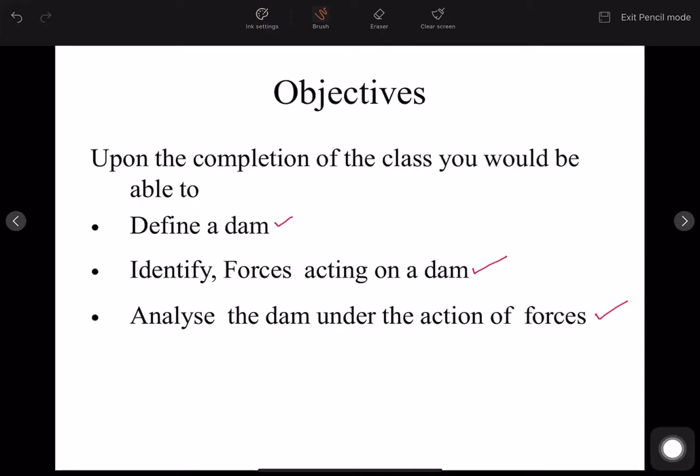So if you go into the subject, initially what is meant by a dam? Dam is a structure constructed in masonry or concrete across a river or a stream. So, a dam is a structure constructed in masonry or concrete across a river or a stream.

So, there are separate theory and separate concepts which involve what is the site selection for a dam structure. So, that means at which location we need to take up the construction of a dam. So such points will be involved in that. So, to store a large amount of water for drinking, irrigation, power generation, etc.

So what is the usage of dam mainly? Generally, it will be constructed for diversion of water actually. So diversion of water, nothing but either you can use such water for drinking purpose or most importantly for irrigation purpose. I mean to say by constructing some canals on the upstream side of a dam structure, and also for hydroelectric power plants, that is for power generation purpose.

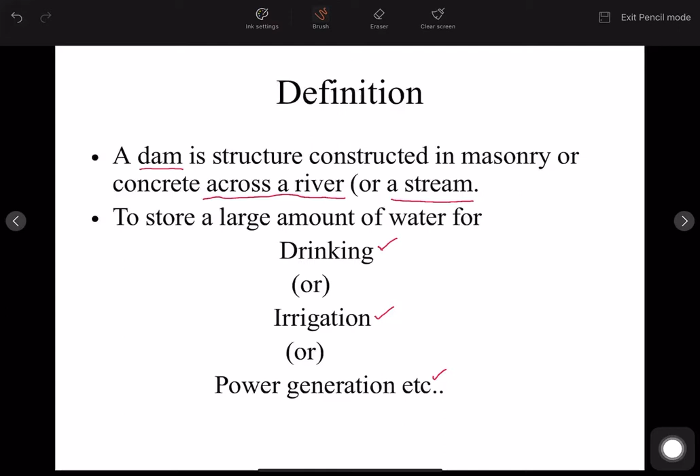So if you go into the next topic, which is forces acting on a dam. The following forces generally act on a dam, that is self-weight of dam represented by capital W. Self-weight of dam, nothing but it can be a masonry or concrete dam. And second one is pressure of retained water, represented by P. So pressure of retained water.

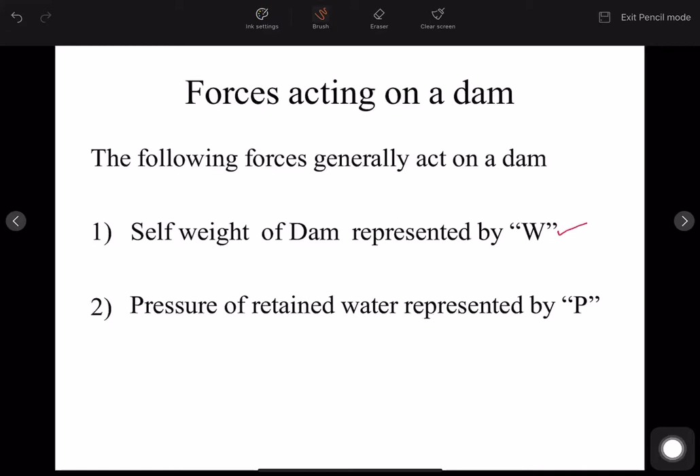So here we can see the cross section of a dam. We call this side as upstream side of the dam and this side as downstream side of the dam. So this is a typical trapezoidal cross section of a dam. As we can see, top side we have certain top width and the bottom side we have certain different bottom width.

So these are the assumed dimensions of a dam. Top side we have considered as small a and bottom is small b, and on upstream side we have a height of water up to small h, and we are considering capital H as height of dam.

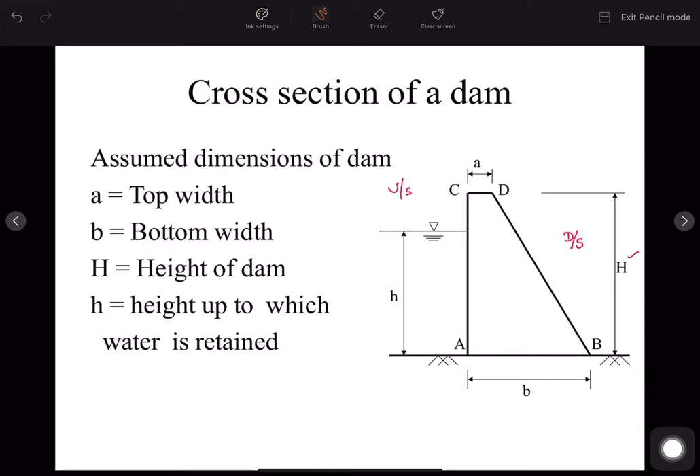So as I have mentioned earlier, the basic forces which are acting on a dam are self weight, nothing but weight of the dam, capital W, and water pressure from the upstream side. So water pressure from retained water, that will be P, right? That will be in the horizontal direction, and as we already know, weight will be acting perpendicularly to the ground surface, that is capital W.

So generally P and W will be acting on the dam. Because of these two forces, as they are orthogonal, there will be a resultant force coming out of these two forces. We'll call it capital R. So now totally there are three basic forces which are acting on a dam, that is horizontal force P due to water pressure, self weight of the dam, capital W, and resultant force, capital R. So like this we can mention the basic forces which are acting on a dam.

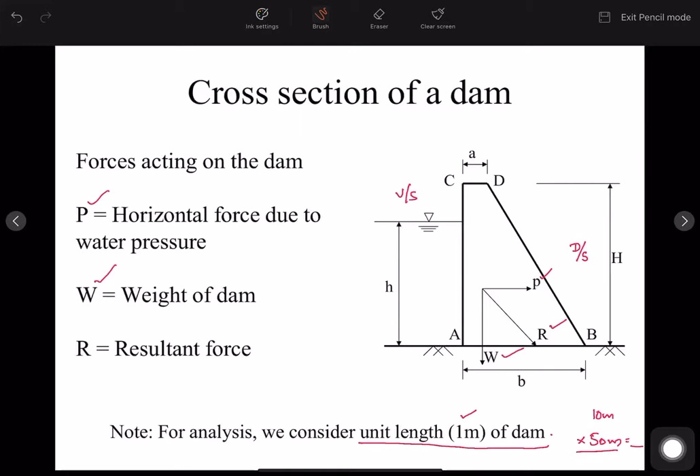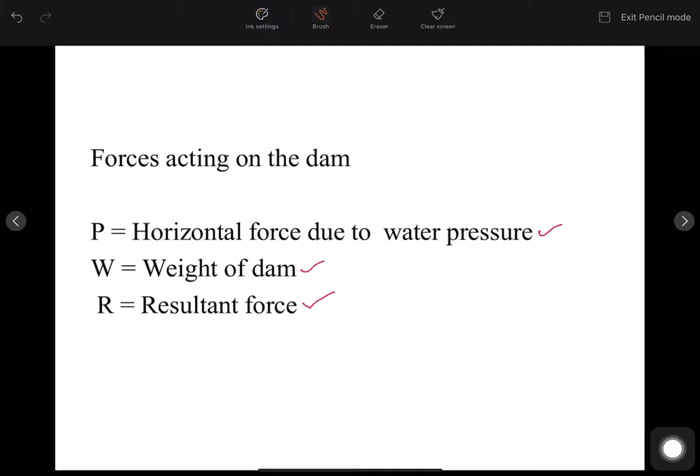So forces acting on a dam are horizontal water pressure P, weight of the dam, and resultant force. So analysis of a dam. This is the important part of this tutorial. So what is meant by analysis of a dam? It involves calculation of magnitude of W, I mean to say calculation of self weight of the dam, and the distance of its line of action from vertical face of the dam.

So we will see here calculation of capital W and the distance of line of action of self weight to the vertical face of the dam, that means here X. So X and W, these two we need to calculate initially. And the next is magnitude of P and the distance of its line of action from bottom face of the dam.

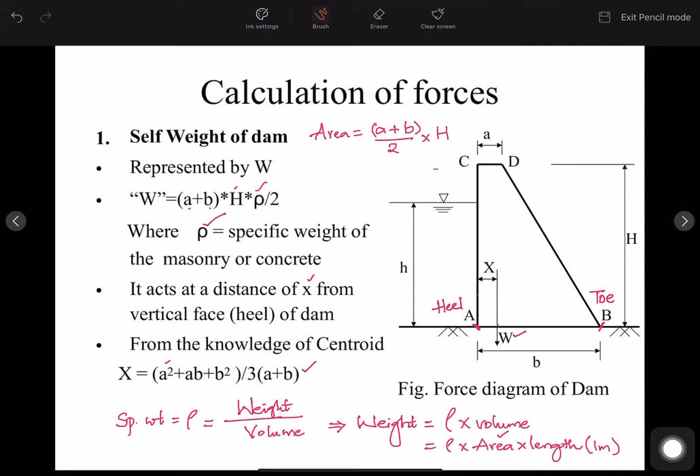So how we need to calculate the centroid of a trapezoid, centroid of a rectangle, triangle, and various other shapes. So by using such knowledge, we can write the centroid equation as (a² + ab + b²) / 3(a + b), right? So we have a and b values here, and if you substitute those values, you can get the x value. So in this, the first part is completed.

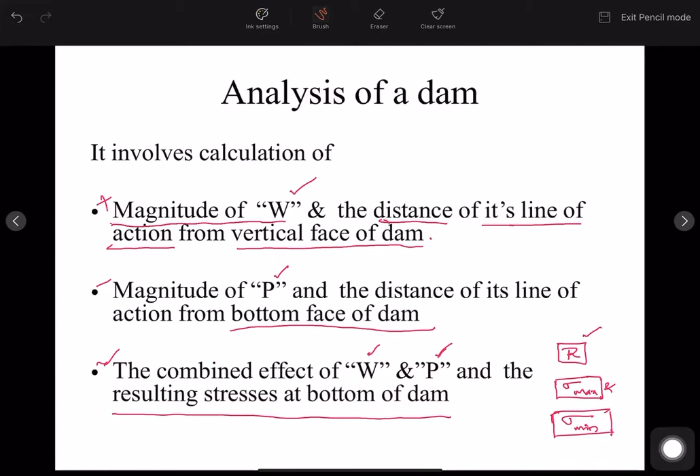The second part is magnitude of P, that is calculation of forces in the dam because of horizontal force. We need to calculate now the horizontal force. So horizontal force P is due to retained water on the upstream side, right? So that I have mentioned here, it is due to water pressure.

So from hydraulics, we know that water pressure varies from 0 to wH. I mean to say from 0 to, this is wH, right? 0 at the water surface and wH will be at the bottom of the dam. So the variation will be linear, and this thing you will be learning in your hydraulics. So as the liquid is water, we can use specific weight of water as 10 kilonewton per meter cube.

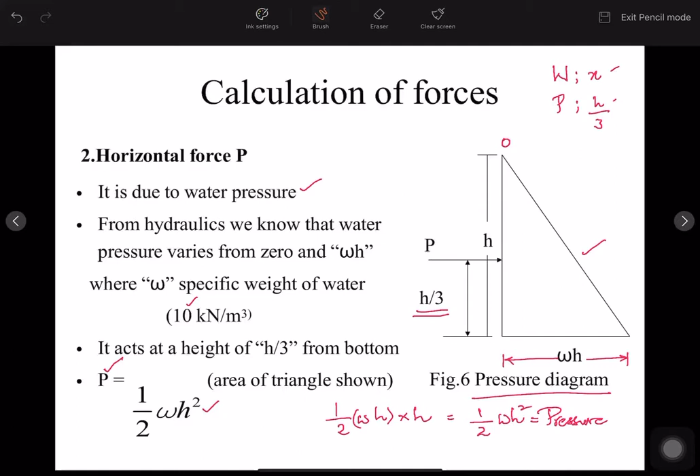Right? Now we got W and its distance x, P and its distance h/3, right? These two things we have calculated now. So after this, we need to calculate the combined effect of W and P, that is nothing but the combined effect of self weight and horizontal water pressure. As I have already mentioned, because of these two forces, there will be a third force which is known as resultant force, right? So that resultant will be capital R.

And capital R is equal to the square root of W² plus P², because these are acting at 90 degrees, and the resultant will be at an angle. So if we apply Pythagoras theorem, we get R equals the square root of W² plus P² in magnitude. This condition is applicable only for the vertical face of the dam structure.

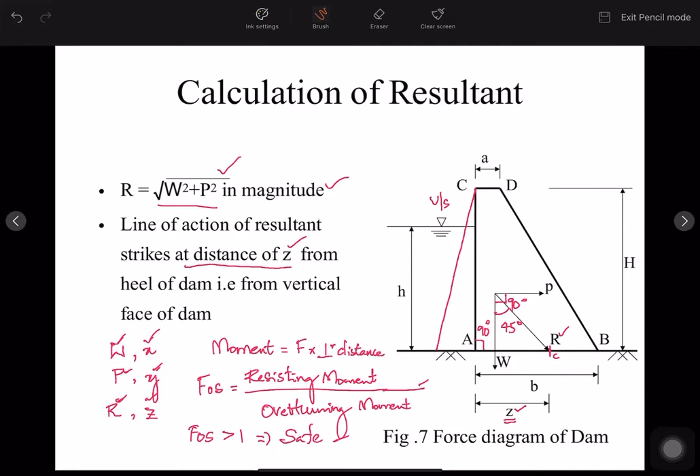So the thought of explaining all this to you now itself means why we need to calculate the force and its acting distances and all that I want to make it clear to you. So we are calculating the forces and its line of action of forces distances. So what is the significance of this Z and what is the significance of this R value and all that we'll see in the next class. So for now we'll conclude this class here, and before concluding we will just revise what all we have just discussed in this tutorial.

So in this class you have learnt about the definition of a dam. So if you remind yourself, a dam is a structure made up of masonry or concrete, which is constructed across a river or a stream. And what are the main purposes of this dam? So it is constructed for various purposes. So most commonly those are for drinking purpose or for irrigation purpose, and also in some cases for power generation purposes. It doesn't mean a dam is only intended for one particular purpose. It can be multi-purpose, I mean to say. So most of the dams, 80% of the dams will be for drinking and irrigation purposes only.

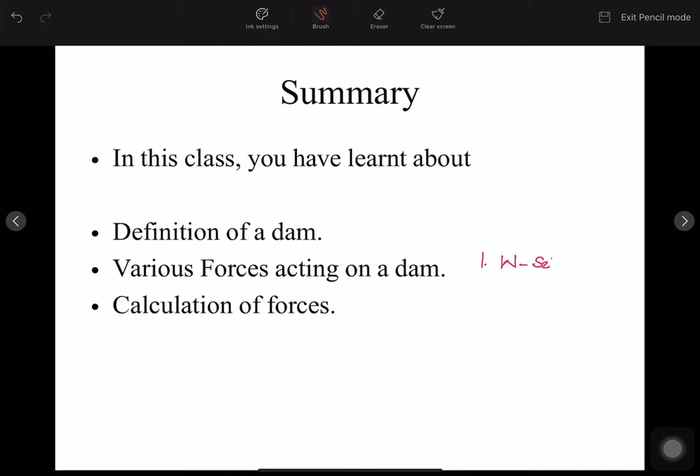And if the volume of the dam is huge, there we can go for hydroelectricity also, I mean to say, for power generations as well. So that is the basic definition of a dam and the basic uses. And next is various forces acting on a dam. So what are the various forces which we have seen till now? First one is W, which is self-weight of a dam. The second one is horizontal force due to water pressure. This is water force.

Right? And the third one, because of these two, we'll get a resultant force, right? So these three are the most common forces which will be acting on the dam. There are some other forces also, like wave pressure and wind forces and various other things, but most common things which are used in analyzing a dam structure are only these three, right? And the next part we have seen is calculation of these particular forces. We have calculated W value, and we have measured the distance of line of action of W from vertical face of the dam, and in the same manner we have calculated horizontal water pressure by drawing the water pressure diagram, which was a part of our hydraulic subject.

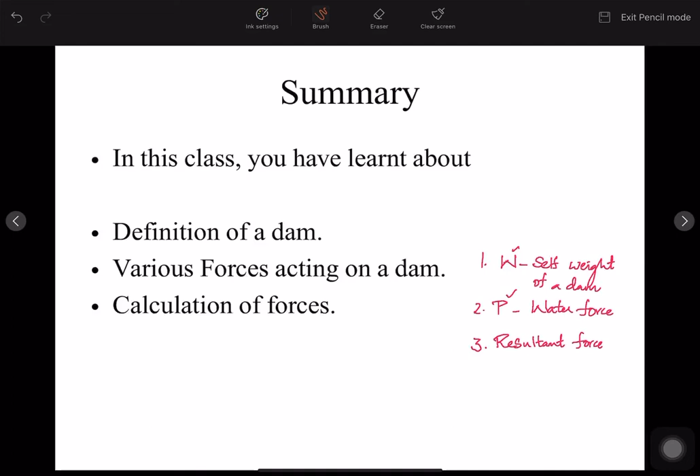And also we have calculated its line of action of force distance from the bottom face of the dam. And after that, because of these two forces, I mean to say the effect of these two forces, we have calculated the resultant force. So as W and P are perpendicular to each other, the resultant will be at an angle of 45 degrees to these two forces.